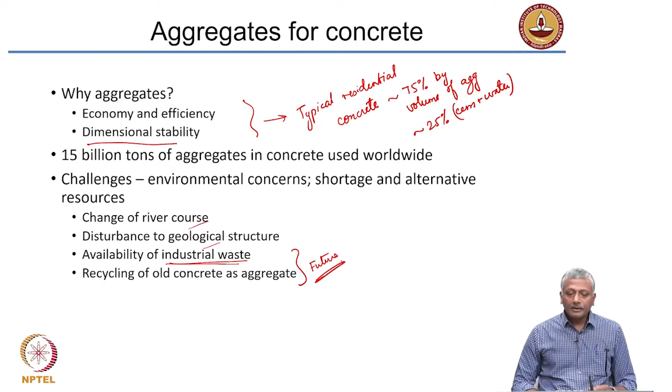Now, how do you classify aggregate? So, I said earlier that concrete is a mixture of cement paste and aggregate. Aggregate itself is composed of coarse and fine aggregate. Coarse means obviously larger sized aggregate, fine means smaller sized aggregate. So, obviously you can classify based on size, you can classify based on source, whether it is a natural aggregate or a manufactured aggregate.

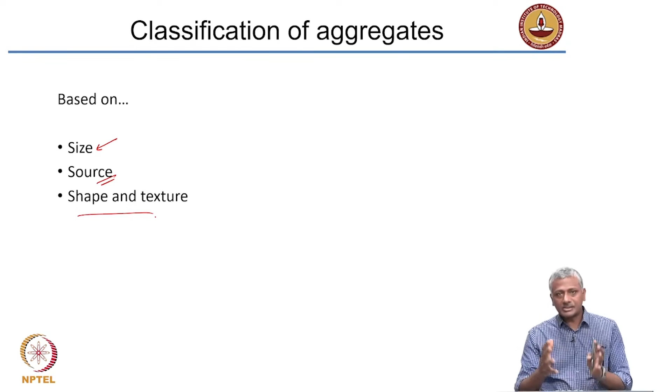Then you can have shape and texture: round aggregate, angular aggregate, aggregate with a rough texture, aggregate with a smooth texture. All that ultimately goes into affecting the properties of the concrete. So, let us look at how that actually happens. Now, first of all, based on size, we define aggregates as coarse aggregate and fine aggregate. The dividing size that we consider in construction is nearly 5 millimeters, or to be more precise, 4.75 millimeters.

Of course, this number is derived from the size of the sieves that were created in the Old English system of units, that is the inch system. Because of that, we have this vague 4.75 millimeter size. Nevertheless, this has now become a standard to classify any material above this size as coarse aggregate and any material below this size as fine aggregate. So, coarse aggregates typically are 40 millimeters to 4.75.

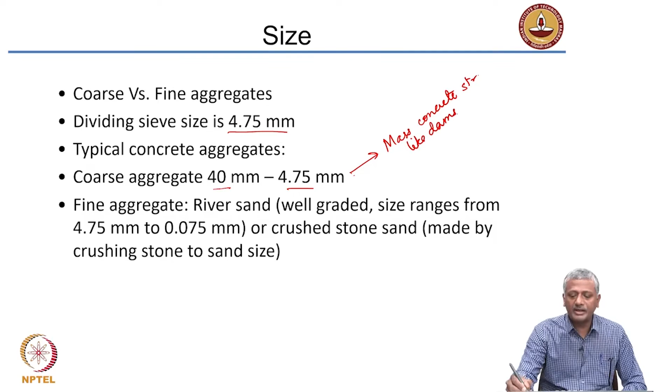Now, of course, in very large mass concrete structures like dams, where we have very large chunks of concrete to be put and not necessarily much requirement of strength from it, in these cases even 150 millimeter size aggregate is used. You can use 80 millimeters, 150 millimeters and so on.

But for general purpose construction, dealing with foundations and building superstructure, we will rarely go with more than 40 millimeters. In fact, for the most part, we will only be going with 20 millimeters. We will not go much more than 20 or 25 millimeters at the most. But you can use in some instances 40 millimeters also.

Fine aggregate on the other hand, as I said, the most commonly used fine aggregate around the world is river sand. River sand is generally well graded, that means it has got a range of sizes from very fine to the coarse size. The size ranges typically in sand are from 4.75 millimeter, the upper limit of sand, to 75 micrometer or 0.075 millimeter. The smaller size particles can create some problems later in the concrete; I will talk about that later.

Or you can also obtain fine aggregate by taking the stone and crushing it into a smaller size. You get what is called crushed stone sand. It is made by crushing stone to sand size. But please remember, this crushed stone sand is not equal to manufactured sand. Very often people use this interchangeably, but it is not technically correct, because crushed stone sand is still obtained from a natural stone and simply crushed to the right size.

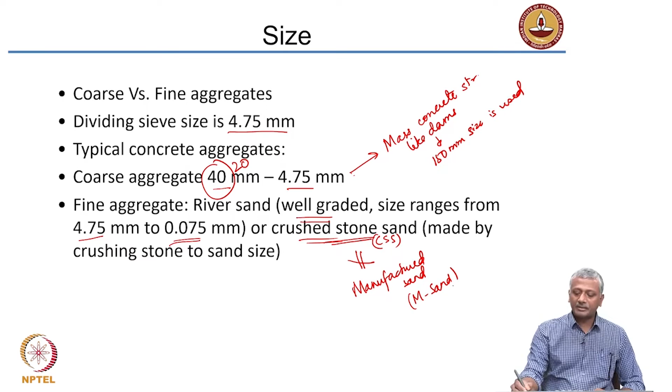If you go to the market, people talk about river sand or M sand, but what they are actually talking about is only the crushed stone sand that is used as a substitute to river sand. M sand has nothing to do with what I call manufactured sand in the true sense of the term. To really get this distinction more clearly, you need to read the standard IS 383.

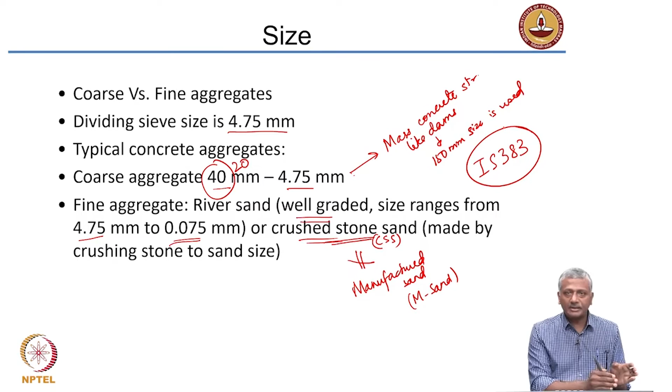IS 383 is the standard for aggregates in concrete. It talks about size, shape, texture, it talks about source and so on. So, based on that you can figure out whether the material that you are using is fine aggregate based on river sand or crushed stone sand or manufactured sand.

So, again as I said, the source can be natural sources like riverbeds. You can collect the material from riverbeds or you can collect it from quarries. Stones are typically broken out from quarries. Manufactured sand is actually sand obtained from artificial sources. For example, if you take fly ash collected from thermal power plants and fuse the particles together to make an aggregate sized object, that becomes a manufactured fly ash aggregate.

We call it fly ash based lightweight aggregate because mostly what happens with fly ash, when you actually sinter it and fuse it, it becomes a lightweight aggregate. More or less like brick making actually, that is what you are doing with preparing fly ash based aggregate. Instead of molding it into a brick shape, what you are doing is simply rolling the particles so that they fuse together to become rounded aggregates, and then you burn that at a high temperature, sintering basically, to get your lightweight aggregate.

The other possibility is using blast furnace slag. Many of you are aware of this blast furnace process where pig iron is obtained. So, we add limestone as a flux to reduce the temperature, and that causes the calcium oxide in the limestone to combine with the impurities in the iron ore in the form of silica and alumina and float on top of the iron as slag. And that slag, if you cool it, becomes solid, and then when you crush it to aggregate size, it becomes a blast furnace slag aggregate.

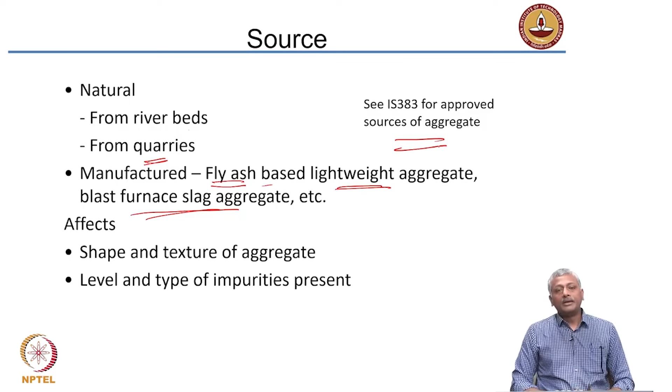The other thing you need to look at is that when you collect aggregates from riverbeds, you need not just have sand, you can also get coarse aggregate from riverbeds. When you get the coarse aggregate from a riverbed, that is called gravel. We typically call the coarse aggregate obtained from riverbeds gravel. And typically, they will be pebble type, rounded and very smooth in texture.

Now, in the case of a riverbed, the kind of rock or the mineralogy of the rock that you get will be varied, because the river carries all kinds of rocks with it. On the other hand, the rocks that you get from quarries will generally be of the same type. If you are in a granite quarry, obviously you are not going to be finding limestone. If you are in a quartzite quarry, you will not find sandstone. So, in a quarried aggregate, your type of rock will be more or less uniform, but in a riverbed gravel, you can get a mixture of different types of rock.

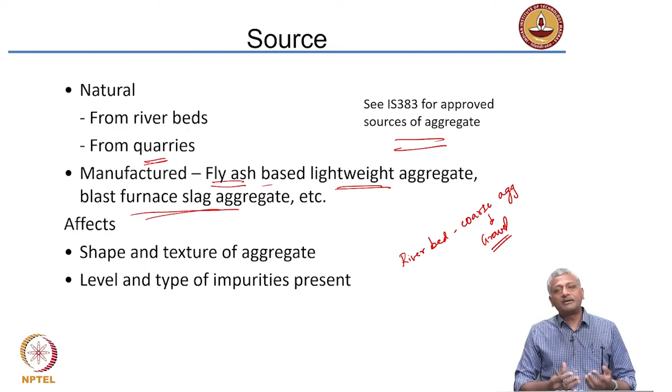So, you basically have to pelletize the particles, make them into small pellets, and then sinter. That means burn at high temperature. And that fuses the particles, more or less like how it fuses the silica and alumina in a brick. The same ceramic bond formation takes place, and then you get sintered fly ash aggregate, which is a good lightweight aggregate.

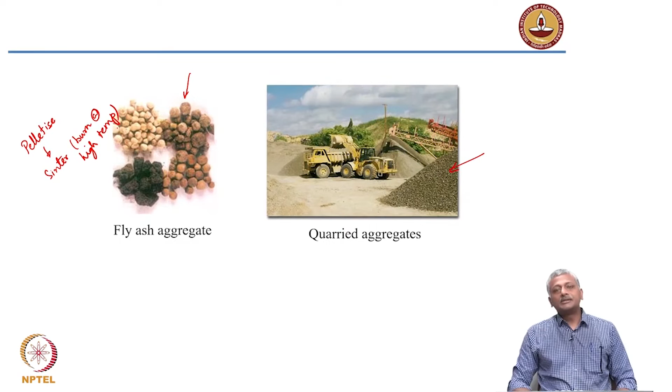So, as I said, your shape and texture will determine the properties of concrete that you get with it. So, what are the different shapes? You have rounded shape versus angular shape. As I said, the natural sources will give you rounded shape, whereas the natural quarried sources, which are broken down into smaller sizes, will get the angular shape. Again, the riverbed gravel will be both rounded and smooth, whereas the quarried aggregate will be angular and rough.

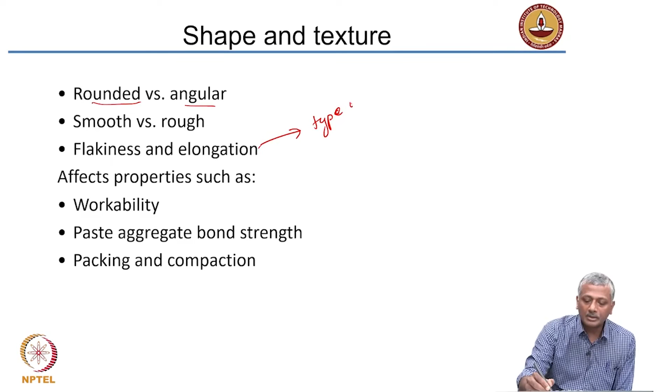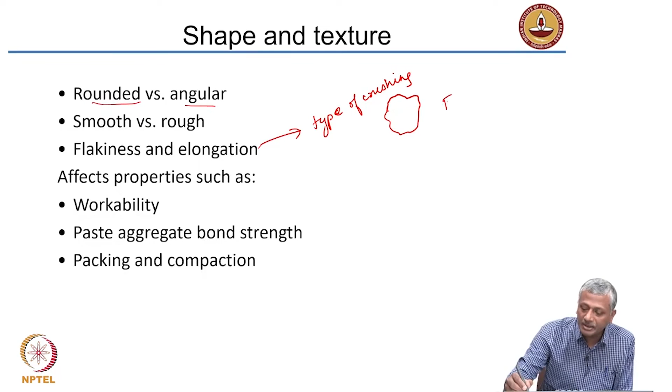And depending upon the type of crushing that you use, the type of crushing of the quarried material may result in flaky and elongated aggregate. So, we typically expect the aggregates to be almost equidimensional, right. Even if it is quarried, the process of crushing should be such that we get more or less equidimensional material, right.

But flaky material is when you have, so if I am taking an isometric view of the flaky aggregate, it has got a very large area on the surface, but the thickness is very less. It has got low thickness. That is a flaky aggregate, and obviously elongated just means that you have a piece which is more or less like that. That is elongated aggregate. So, we want to avoid flaky and elongated material.

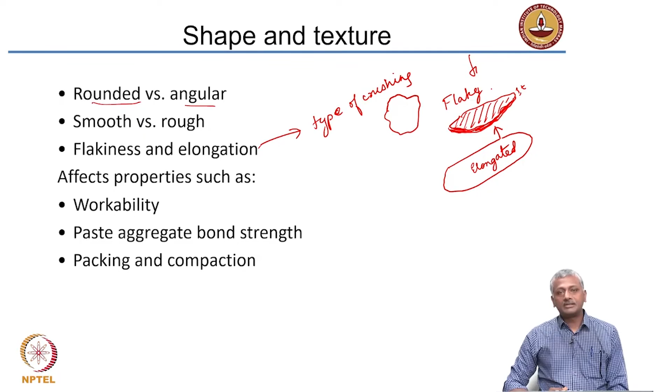Now, why do you think we need to avoid that? So, flaky material, as I said, has a very small thickness. So, what will happen is when you are loading this concrete which has such flaky aggregate in it, if a crack has to go, it will go right through because this aggregate is going to be very weak. Okay, flaky aggregate is going to be extremely weak. So, you do not want a flaky aggregate inside.

Elongated material, what will happen is, you have seen several pictures where concrete has to flow between reinforcing bars. So, concrete is poured and it has to go between the gaps in the reinforcement. If you have elongated aggregate, what will happen? It will sit on the gap and block it. So, your concrete will not be able to flow through the reinforcement. So, flaky and elongated aggregate have to be avoided in large quantities. Some amount of flakiness and elongation is acceptable. Again, IS 383 gives you the limits of what is acceptable from that perspective.

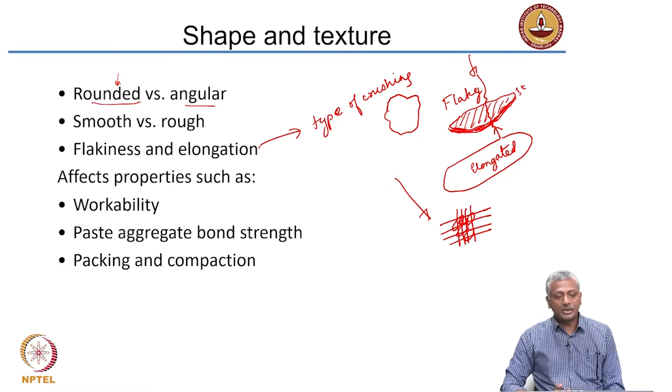So, not only will they affect these aspects like strength and so on, they may also affect the workability. Okay, the use of different types of aggregate may affect workability. When you have a rounded aggregate, you will get a nice cohesive mixture. So, high workability when rounded aggregate is used. With angular, there will be less workability.

Workability simply is the ease with which you can work with the concrete. That means the consistency or fluidity of the concrete, how easily it flows. That basically is one of the factors that govern workability. So, we typically measure it, as you will see later, in terms of some methods that determine the fluidity or consistency of the concrete. So, when you have rounded aggregates, you get better workability. When angular aggregates are used, it gets lower workability.

The other aspect is the paste aggregate bond strength. I will talk about this in a little bit more detail somewhat later. Essentially, the strength of the concrete is truly only governed by the paste aggregate bond strength for normal aggregate. When you start using artificial lightweight aggregate, for instance, the aggregate strength also can be a determining factor. But in most normal concrete, the aggregate or the rock is usually much stronger than the cement paste. As a result of which, the bond between paste and aggregate really affects the strength of the material.

So, when you have a good bond, you get high strength. When you have a poor bond, you get low strength. So, generally a smooth aggregate will lead to a poor bond, right? You can clearly imagine that will be the case. A rough aggregate will lead to a good bond. Okay. And as I said, when you have flaky and elongated material, it will also affect the strength and the ability to pass between reinforcement.

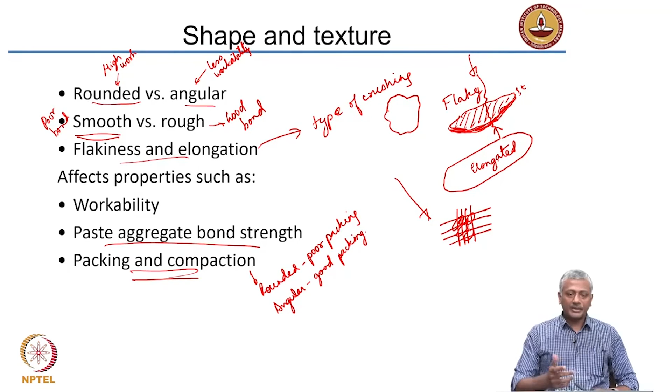So, what are the relevant properties of aggregates that need to be tested in order to qualify the aggregate as suitable to be used in concrete? One is, of course, the crushing strength of the aggregate. Now, in most concretes, the crushing strength does not become a major factor. Nevertheless, this is something we need to have an idea of. The modulus of elasticity of the aggregate is important. We will see why. The hardness, impact and crushing resistance is important.

Specific gravity, the gradation, that means the range of particle sizes that you have. The bulking: the fine aggregate can absorb moisture and then increase its volume. The soundness of the aggregate, the ability to retain its volume in difficult circumstances. And then the presence of impurities. We already talked about the fact that in some cases you can get impurities like organic matter or clay, which may affect the quality of the material.

So, if you look at the parent rock, obviously the parent rock could be of different types, let's say granite, limestone, quartzite, sandstone and so on. What happens is the parent rock has been subjected to some type of temperature and pressure environment, and once you start breaking it down, whether you have an igneous or a sedimentary or a metamorphic rock, the kind of crushing will produce different sizes, shapes and textures of the aggregate. We already talked about the fact that that will affect the concrete mixture proportioning, and it will also affect the workability and the fresh properties of the concrete.

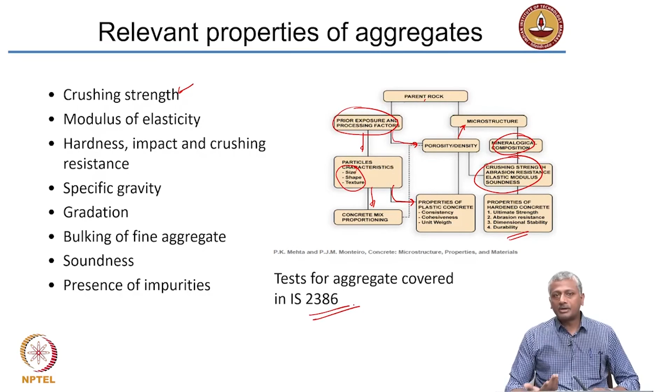So, the formation of the material, the mineralogy of the material determines its properties, and that will affect the properties of the concrete that you get. That is the ultimate strength, the abrasion resistance, the durability and dimensional stability of the concrete. Let us take a look at these tests in a little bit more detail. Of course, the tests themselves are covered in an Indian standard IS 2386, very important for you to go through that standard to understand what are the different tests. Many of you will actually have laboratory classes also to talk about these tests.

So, as I said, the crushing strength of the aggregate usually does not come into the picture because for most normal concrete, the paste aggregate bond governs the strength, and in such cases the aggregate strength is generally much greater than the concrete strength. Now, when you start going towards higher strengths in concrete, or you strengthen the paste aggregate bond to a large extent, what then starts happening is your aggregate strength becomes almost equal to your concrete strength, or the concrete strength starts catching up with the aggregate strength.

So, once you break a normal concrete, what will happen? Those of you who will do this experiment later will see that when you break a normal concrete, let us say of strength less than 35 to 40 megapascal, when you break the cubes in compression, you will see that the failure crack goes around the aggregate, indicating that the failure has started in the interface between the paste and the aggregate.

Whereas in high strength concrete, the interface is strong, so you will see the crack goes right through the aggregate. Now, does that mean the rock is of lower strength than the concrete? Possibly not. It is just the rock which has been cut to aggregate size or formed to aggregate size may have a strength which is lower than that of the concrete. So, please remember, aggregate strength inside concrete is different from that as a rock.

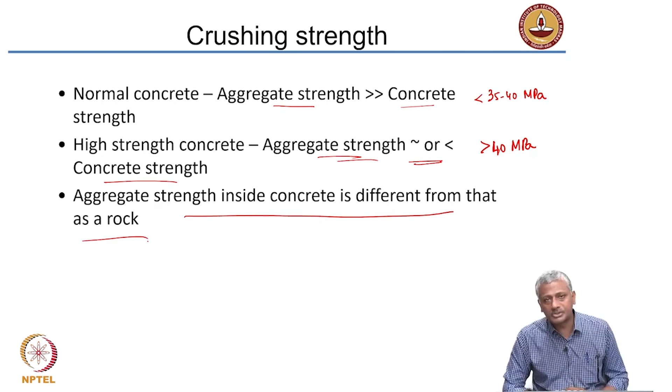What about the stiffness of the aggregate? Why is it important? Now, concrete is a composite material, aggregates are embedded inside paste. So, when you start loading concrete, I already talked about the fact that stiffness of the aggregate is generally much more than stiffness of the paste. So, modulus of elasticity of aggregate is generally much more than modulus of elasticity of paste. Again, this is for normal concrete. When you start strengthening the paste in high strength concrete, it becomes more and more equal. It never becomes totally equal, but becomes more and more equal.

So, what will happen now is, when there is a large mismatch, one stiff material and another less stiff material, when you start loading this, the load distribution will be such that the stiffer phase will get more load. The aggregates will attract more load. So, the zone of the paste which is attached to the aggregate will be experiencing very high stress levels as compared to the zone of paste which is away from the aggregate.